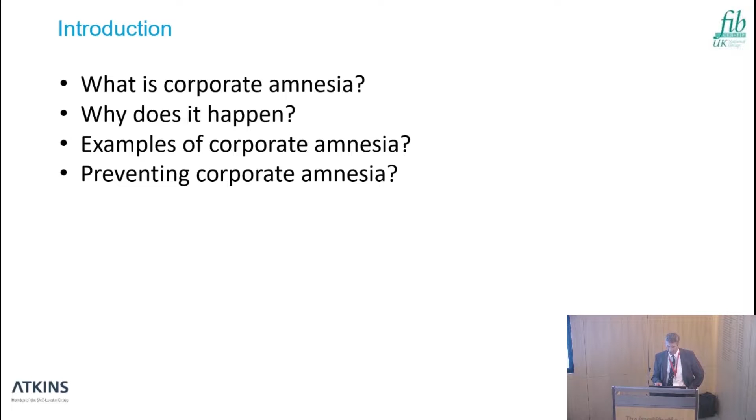So what I'm going to do, I'm just going to very quickly talk about what we mean by corporate amnesia and why it happens. Then I'm going to come up with a few examples that I've seen myself in my day-to-day work around corporate amnesia, and then I'll finish up with some thoughts about what we might be able to do to prevent corporate amnesia, because it's pretty costly to the construction sector.

So, where do we all go for our information these days? Wikipedia, of course. It's always correct, as long as you validate it multiple ways. I quite like this definition, though. Corporate amnesia is a phrase used to describe a situation in which business and other types of cooperative organisation lose their memory of how to do things.

So this implies that at one stage we knew how to do it, but then with the passage of time, either whole organisations or bits of our organisation just fail to learn from other bits of the organisation, and we don't do quite so well.

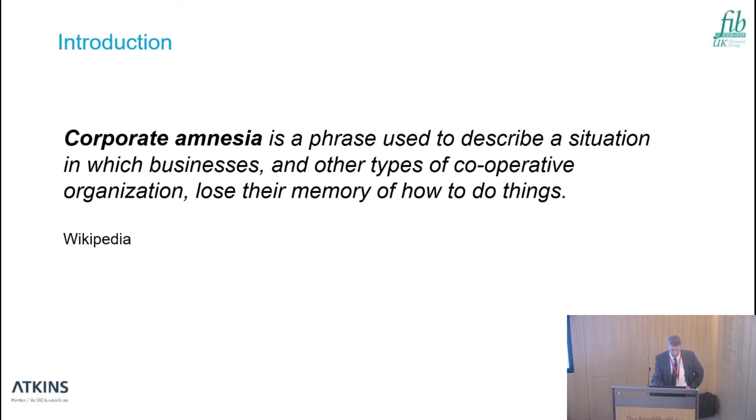When I was putting this together, I tried to scratch my head myself to think, why does this happen? Why do we get things right and then years later we don't get them right anymore? What happens? I'm sure this is not a comprehensive list, but these were some things that I recognised in my own organisation and day-to-day activities.

So first of all, a lot of our information is tacit. It sticks in people's heads. And it's obviously quite difficult to download the contents of somebody's brain onto paper or onto intranet sites. But often there's probably more we could do there.

So because so much information resides in people's heads, when we've got a need to call upon that expertise, often people are just too busy. So you don't get the right person on the project that has the right expertise.

And of course, people move around as well. Ever increasingly, people move from one organisation to another, at ever increasing rates. And so we constantly have an outflux of good information leaving our organisations. Of course, you'd hope some good stuff comes in the other direction as well, which I'm sure it does, but we lose information with that movement.

I see less of it these days, but if I looked at my own organisation, probably sort of 10 years or so, there were quite a lot of examples where people just deliberately didn't share their information. They wanted to hold onto it because they saw it as their pension - this is why you carry on employing me. Knowledge is power. I think we see a lot less of that these days, but there's still a pitfall there.

And then sometimes we have the information within our organisations, but we just don't know it's there. We don't know we've got that expertise. We don't know somebody's learned from a mistake in the past.

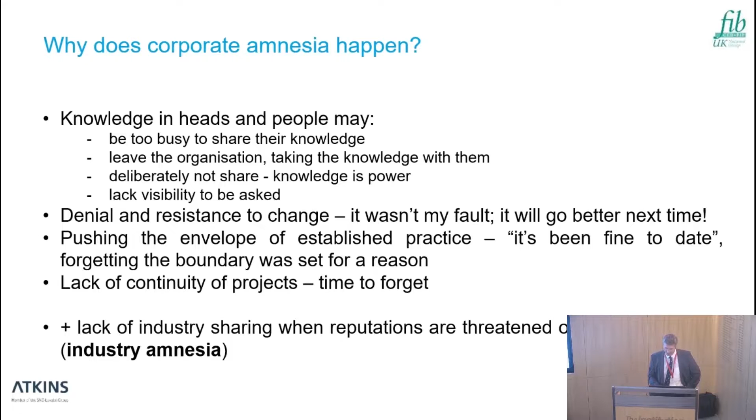I'm going to come on to some examples in a minute, but I quite like this. I'm sure everybody's familiar with this set of quotes from Donald Rumsfeld. Maybe the language isn't very elegant, but I think it's quite a good insight, and it's also quite useful when thinking about what we do corporately.

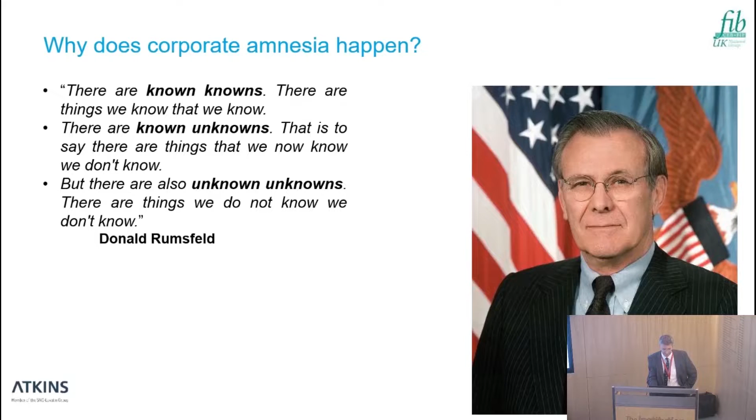So the first one: there are known knowns - things we know that we know. In day-to-day terms, this is basically business as usual. We know what we're doing here, we've learnt the lessons, great, we'll do some more of that.

Then the known unknowns - things that we know we don't know. Well, we don't do that, that's not within our business, we'll stay away from that. If we've got to do that, we'll buy in the right expertise.

Then we've got the unknown unknowns - these are the problems we are all going to stumble into because we don't know what we're doing here, or we thought we did but we don't. Hopefully we'll pick up the pieces, nothing too serious will happen, and we'll move on from that.

But for me, there was a part of this quote missing, and I'm very pleased to be able to unveil the rest of it.

It really was provided courtesy of Stuart Matthews, who's sitting at the front here, who retired from BRE and is an honorary member of fib UK. Stuart basically said there's something missing here, and that is the unknown knowns.

The unknown knowns are basically the things that we do not know that we do know within our organisation, or didn't know. And that really is corporate amnesia.

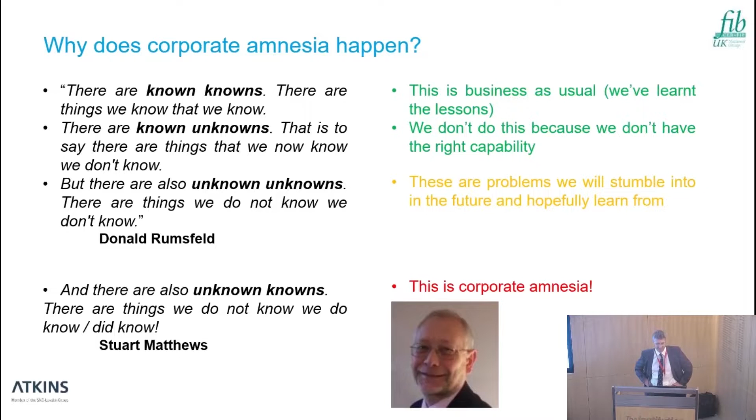So I've got a few examples here of things that just seem to happen repeatedly, often from one organisation to another, but also repeatedly within an organisation. A lot of these, to begin with, are going to be around curved prestressing tendons. I've seen so many issues with these in my 27 years of employment, and I can't believe they still happen, but they do - happening all around the world on a pretty weekly basis, I think.

If we have a curved prestressing tendon like the one shown on the screen, fairly obviously that generates a force into the centre of the curve. If that tendon is too close to the cover zone, and there isn't enough strength in the cover zone, we may well see an appearance of the tendon through that cover zone. These forces can also lead to distortion of cross sections and other forces we need to consider, but sometimes they do get forgotten about.

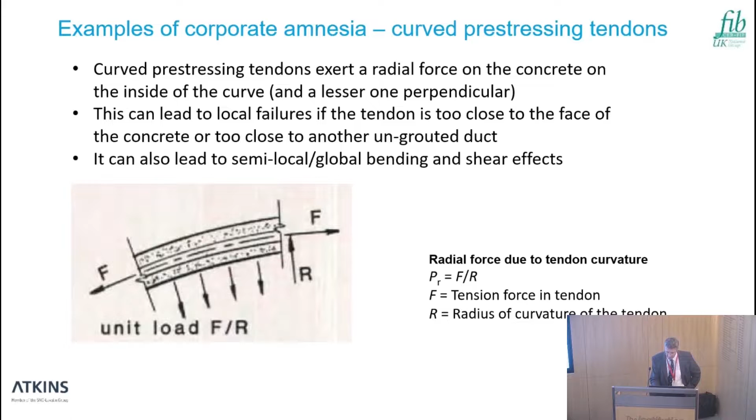Tendons can be curved in bridges for all sorts of reasons, often just by virtue of the shape of the cross section. So if we have a bridge like this one - and there weren't any problems with this bridge, which is why I haven't cropped it or hidden what it is - this is built in cantilever, so construction starts at each pier. The bridge meets in the middle, and then we have some prestressing tendons to join it up, which often follow the shape of the soffit of the section.

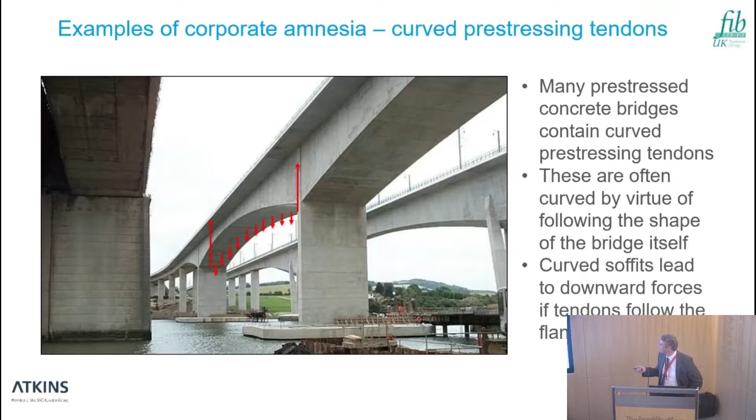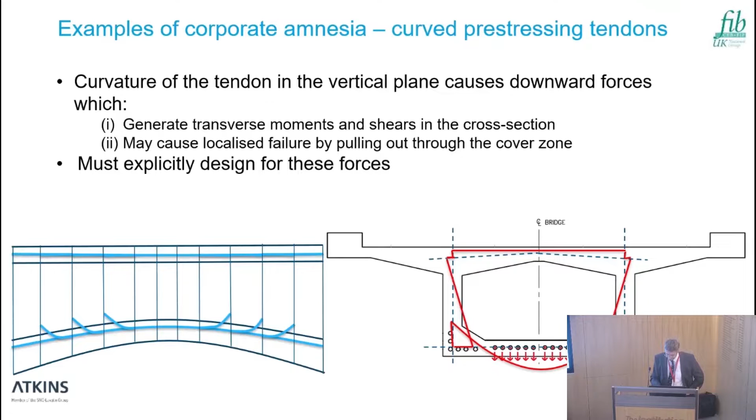But the curvature could also be in plan as well. This is an extract from the Docklands Light Railway extension from the early 90s, one of my earliest designs. The very heavy curvature in plan, combined with the tendons running in the webs, means there's an outward force from the tendons into the centre of the curve.

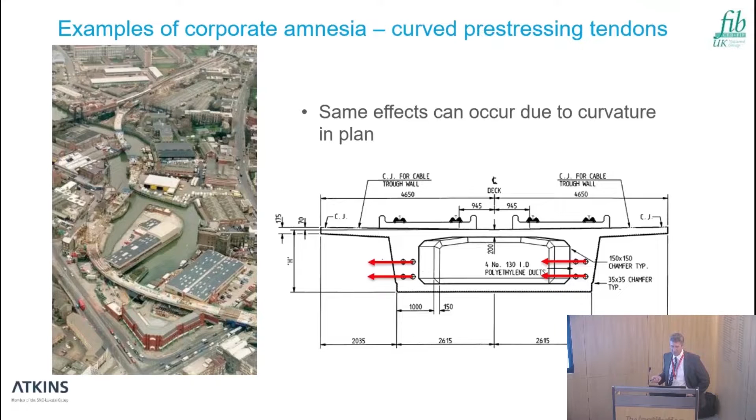There's not a lot - well, I think a lot of designers will recognise there's a force here and a problem. But amazingly, there isn't much guidance in the codes on how to specifically design for it. The only one I'm aware of is the American code AASHTO, the American Association of State Highway and Transportation Officials, which tells you that if you've got a group of tendons like this, you need to check the cover for local bending from that load and for shear. If that doesn't work, you need to put in links to confine the concrete or the tendons, or just change the design.

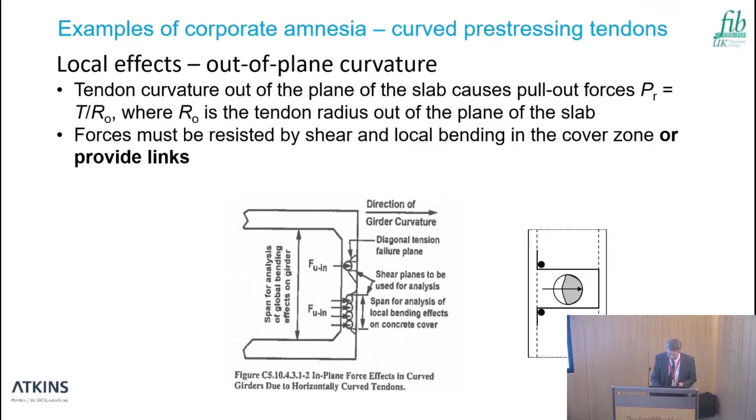And this is a real issue. I couldn't find a recent failure photograph of this, because people tend not to want to put them on the internet. This was a very grainy old one from a paper which I'll mention in more detail in a minute.

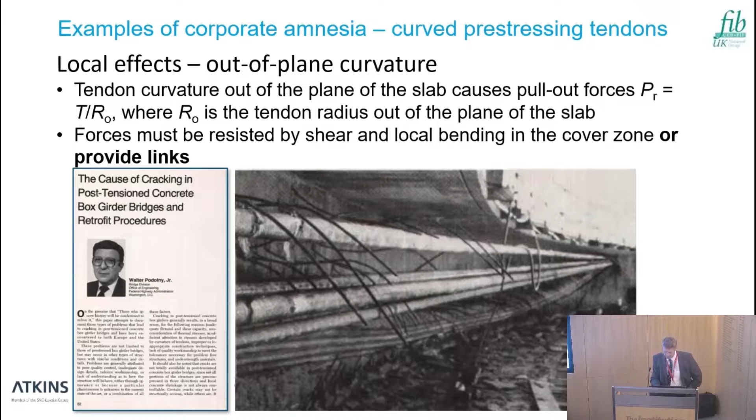But this was a bridge in the US - a curved box girder, curved in plan. You can see that after stressing about two-thirds of the tendons, there was a massive bang, and the tendons pulled out sideways through the web under that force. What we now have is a straight length of tendon as a chord between the diaphragms at each pier. I'm pretty sure the designer of that never did this again - they were very switched on to that effect afterwards. But whether they managed to communicate it to everybody else in their organisation downstream, we'll never know.

There's a secondary issue here, perhaps less appreciated. If we've got curvature in this direction, it's clear there's a downward force. But there's also a force of lesser magnitude, about a third, in the transverse direction. That's because the strands in pre-stressing are not a rigid bunch - they're not all welded together. So when they pull down, they expand out sideways. It's a bit like the pressure in a fluid, in actual fact.

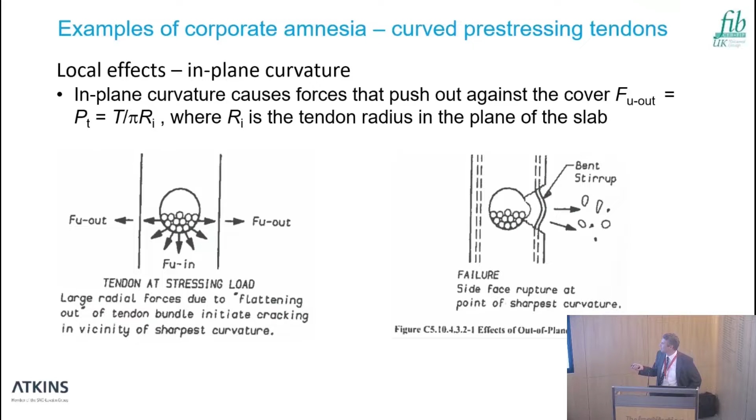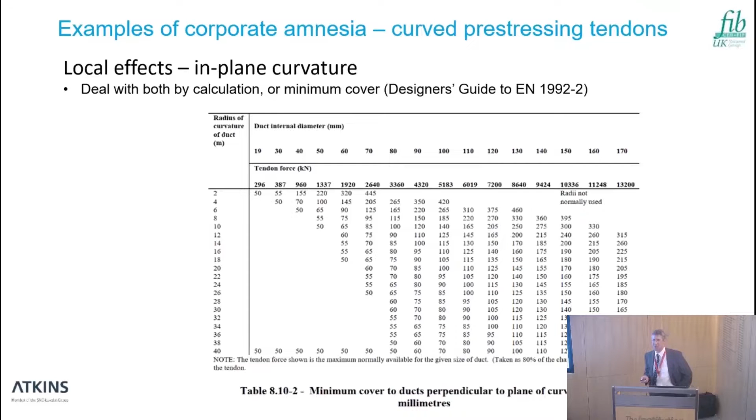And if you put them with high curvature too close to the edge cover zone, you will get spalling. In the old British codes, we didn't have to think about this in particular detail - there were just tables. This table shows on one axis radius of curvature, on the other axis essentially pre-stressing force, and the table tells you how much cover to provide to prevent that bursting. Slightly strangely, there's nothing in the Eurocode now that explicitly covers that problem or prompts designers to look at this issue.

But all the things I've talked about so far, I'm going to continue talking about. They've obviously been known for a very long time. This paper in the PCI journal was published in 1985, and it covers pretty much all of these tendon problems collectively, found around the US and Europe. I quite like the introduction, which basically says: on the premise that those who ignore history will be condemned to relive it, this paper describes a whole load of failures for your delectation, moving forward.

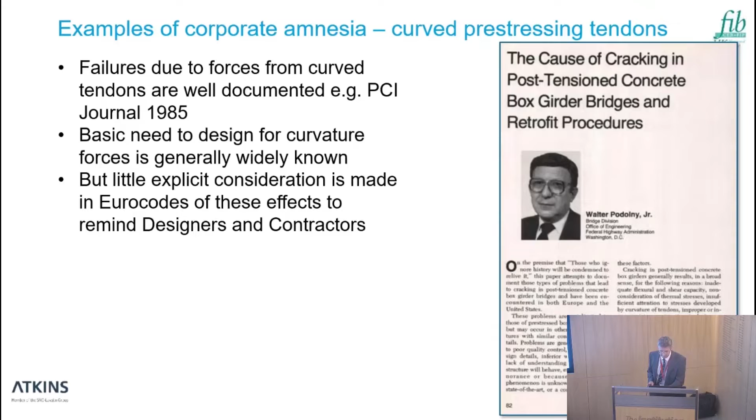Most designers know there's a force involved here from the tendons, but what seems to be forgotten from time to time - and this is when we actually get failures - is that it's very easy on a drawing to have something with a curve on it and calculate a force.

But what isn't done quite so often is consideration of what if that curve isn't perfectly achieved in the design, because it doesn't have to be even within specification. There are tolerances, and the cable doesn't have to be exactly where it should be. How often do designers actually take those additional tolerances into consideration when they calculate forces? Sometimes you might be quite shocked if you calculate what could legitimately be constructed and see how that changes your forces. It's quite an eye-opener sometimes.

There are examples where people building these things get a bit complacent, thinking nothing's happened on my last 3, 4, 5, 6, 7 jobs, so perhaps I don't need to be as careful as we have been in the past. Sometimes the whole need to achieve a smooth profile isn't communicated quite as clearly as it should be. In the spirit of designing out risks, if you find a design is quite sensitive to the placing of tendons, we need to rethink the geometry or think about building in some links to constrain it.

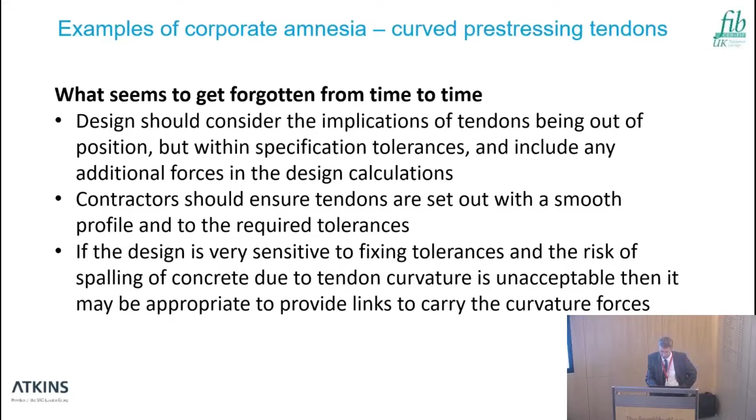The diagram here indicates segmental construction - the bridge was built segment by segment. These blue lines are the pre-stressing tendons, and the little blue lines moving up are where the tendons come out of a slab into an anchorage blister. So it's a fairly standard bridge construction, and the continuity tendons at the bottom here were being stressed up on this particular bridge not very long ago.

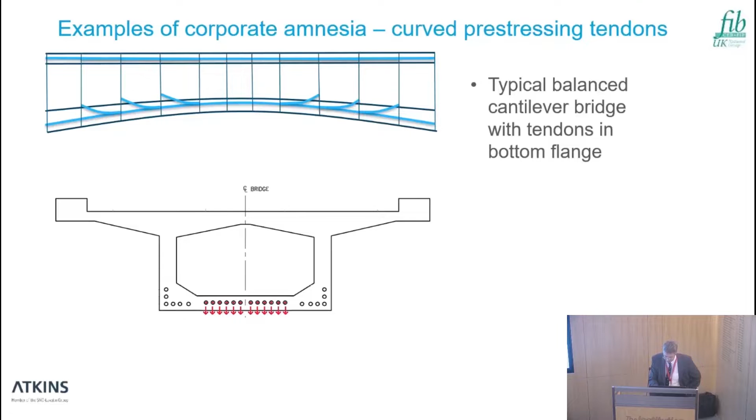There was a nice big cracking noise, and then on the underside of the soffit, this large - I call it a crack, but it's actually a 120 mil step - so not so much a crack as a local shear failure of the cover zone, appeared. This line was basically following the line of one of the tendons.

Upon investigation, done through ground penetrating radar, all the concrete was taken off so you could actually see it later on. What actually happened was that the tendons going through each segment were correct in position at each joint, because there was a stop end at each joint, so they had to be in position. But under the concreting operation, which had driven the concrete down the webs of the box and into the slab, the tendons had been pushed downwards and also pushed laterally at the same time.

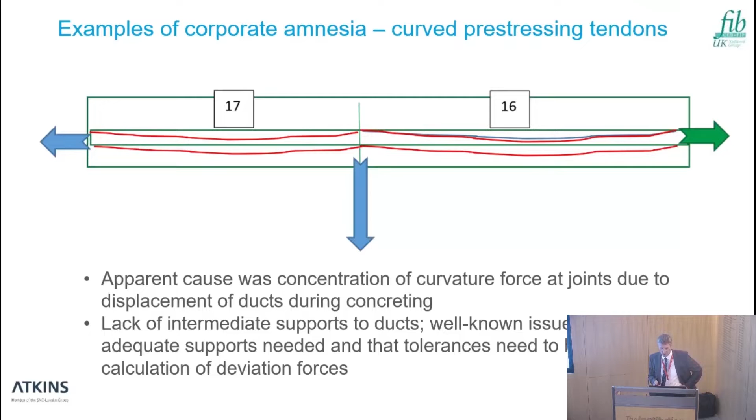This was fairly and squarely due to not supporting the tendon at sufficient intervals to give it the stiffness to stop it from doing that. If I go back to that paper from 1985, you actually see exact pictures of this scenario and exactly what will happen if you allow that to happen. So, in this particular situation, not a great triumph of learning from the past.

But I think in this case there were another set of mitigations that could have been done. Clearly there should have been more supports to the tendons - that's just a fact. But one of the other things was that the detail employed for this particular cantilever had the tendons as a constant offset off the bottom of the section.

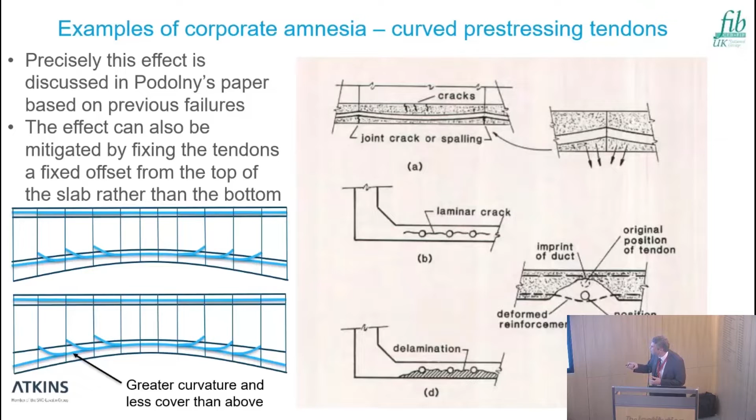This might sound like a good idea to maximise the lever arm. But on the basis that you really want the maximum lever arm mostly in the middle of the section, one trick a lot of people use is to offset the tendon from the top of the section, which both flattens out the curve, reducing the force, and also, over most of the span, gives a greater depth of concrete to resist those pull-out forces. So if you do need to put in links locally to control that spalling effect, you only need to put them in the central area where you've got the least cover.

None of the things I've shown resulted in anyone being hurt or killed, so nothing as unpleasant as the first two talks, but this is still pretty expensive to put right. The repair here was to completely demolish the slab in this area, full depth, after de-stressing the tendons, then recast. Some additional links were put in, even though calculations said they weren't necessary, just because they didn't want to see these tendons fail again. Then it was re-stressed, the job was good, and on we move.

This is a similar example, though from some time ago rather than very current. This was a few years back, but it's a similar story: a balanced cantilever bridge with tendons being stressed, located inside this section of the curve.

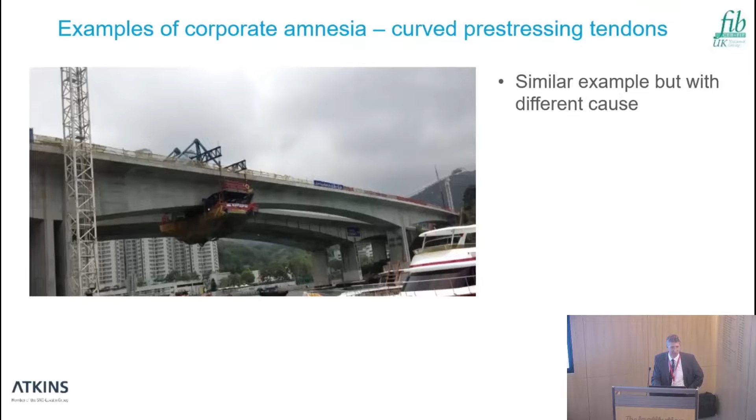Again, stressing, bang. This time, strangely, the people doing the stressing could see the crack because it was on the inside of the section. You think, well, that's quite an achievement, isn't it, to fight the direction of curvature and have something appear on the inside.

Initially the contractor said this was bad design, a compression failure. But that clearly can't be the case, because if it was a compression failure, the whole flange would have disappeared, not just a crack like that.

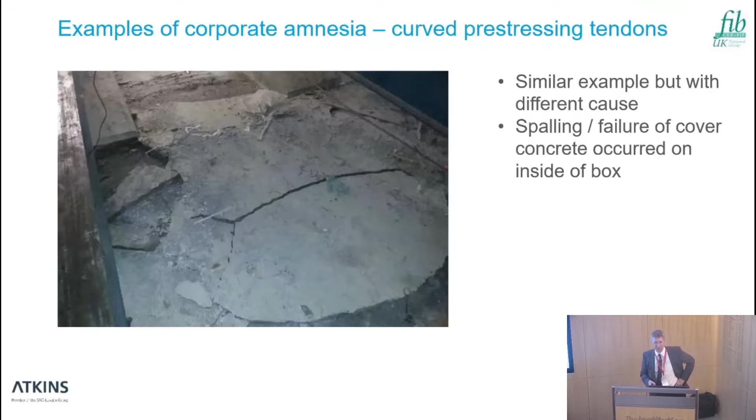This was another frequently made mistake: in the design, the assumption was that the soffit would be a continuous, smooth curve. But of course nothing actually gets built like that in segmental construction - you make a smooth curve out of a series of steps. So the design showed a constant offset off the top, when actually, to fit a constant smooth curve through a sort of threepenny-bit shape, you needed a slight variable offset. One could say it was obvious, but it wasn't explicitly stated.

So what actually happened in construction was a constant offset was achieved in the slab. Then, when you start to build the next segment, you realize you're pointing in the wrong direction. So a reverse curve was introduced to correct things and get back where they should be in the next section. And this upward force, which I haven't shown very well, had a much smaller cover distance here than in the soffit zone, so it pulled off the top.

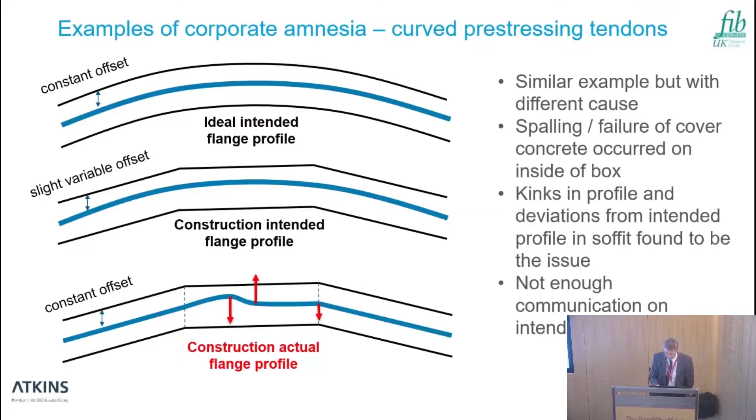In this particular case, the extent of the damage was quite a lot smaller because it was very localised, but it was still a blooming nuisance and delayed the programme. The solution was fairly similar: the tendons were de-stressed, the concrete removed, then the tendons were lightly stressed just to take out any bend and straighten them up, then de-stressed again and reconcreted.

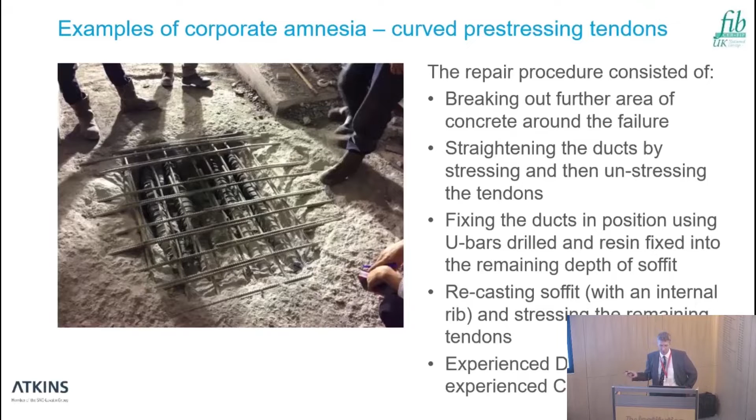But in both of these situations, the interesting thing is it was not somebody being unaware of the problem - it was experienced designers and experienced contractors. They'd heard about these sorts of problems, but it had never happened to them before. In many ways, I think it's difficult to rule out a degree of complacency in some of this design, and not communicating risks maybe as well as should have been.

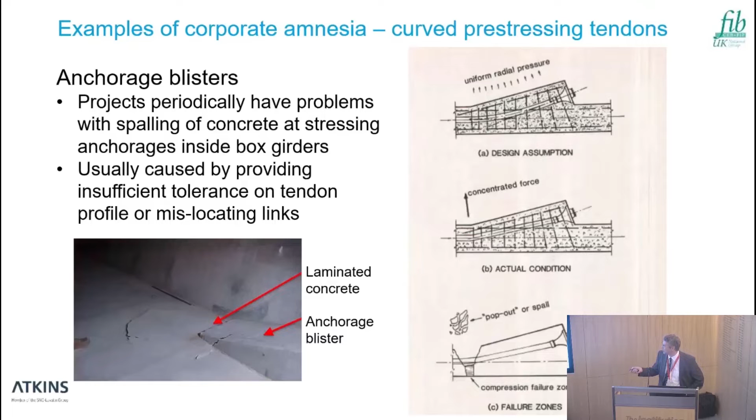To avoid this sort of thing in design, you really want to keep the end of that curvature, the tangent point, well inside the blister, and communicate the pitfalls of what might happen if you don't do that.

Here's another example where I don't know whether this is because the design actually had some curvature going into the slab, or whether this was not constructed properly. But you've obviously got curvature going on outside here that's led to this sort of spalling.

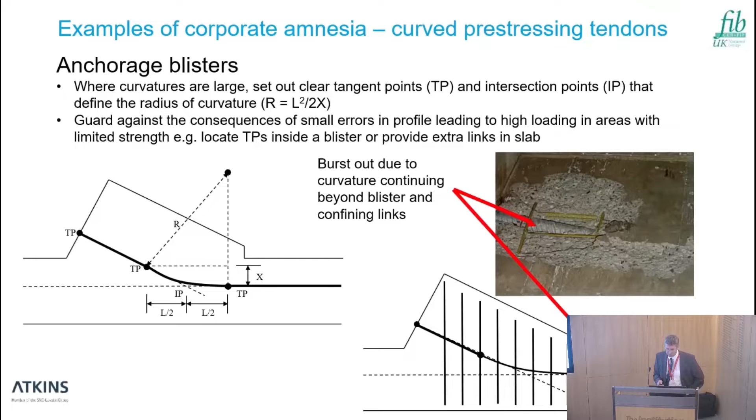There's at least three ways of preventing this. One is to put some compressible material into the cover zone that will ensure any concentrated forces can't bear on the cover zone and bear more inside.

There are bell mouth details, where the pipes inside have a flare on the outside that stops contact. And there's what I call the overbent solution, where instead of having a radius over the full width, you choose to keep your tangent points some way inside.

So the radius becomes tighter, but by doing that we have some tolerance. If the cables are not quite aligned as they should be, you just move the tangent point around the curve, and with deflections the tangent point moves around the curve, but we keep the force away from the cover zone.

These solutions are quite well known, but on all the projects I've been involved with, there's always some pressure at some point from the contractor saying: I don't want to do a bell mouth, that's expensive. I don't want to put in compressible material, that's a nuisance. I don't really believe in this overbent pipe solution.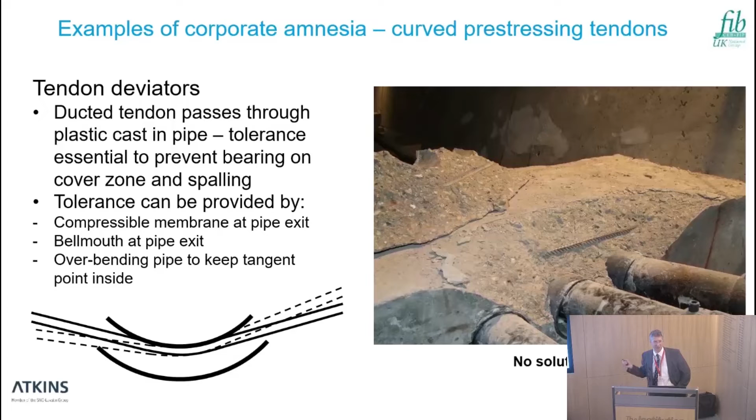I know this organisation has designed these before and not had problems, so something's gone wrong - either being under pressure, or not having learned from a previous team.

When these things happen, these are some of the phrases that kind of come out from people. 'Didn't know it was a problem' - that's probably not so much the case.

This one's more the case: 'We've detailed this before, but we've always been criticised for over-detailing, so we kind of slackened things off a little bit this time.' And oh dear, look what happened.

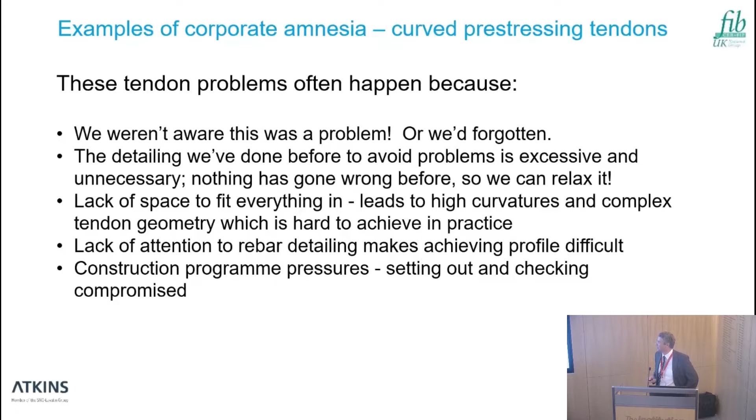Congestion's often the problem - trying to fit things into very congested areas generates big curves, which makes it difficult to construct. But I think number one is often construction program pressures as well, particularly with setting out.

So just a couple of things just to finish with. I'm very conscious of time.

Much smaller things. I was talking to Akram earlier on, and I think you said something like, this is the bane of my life or something.

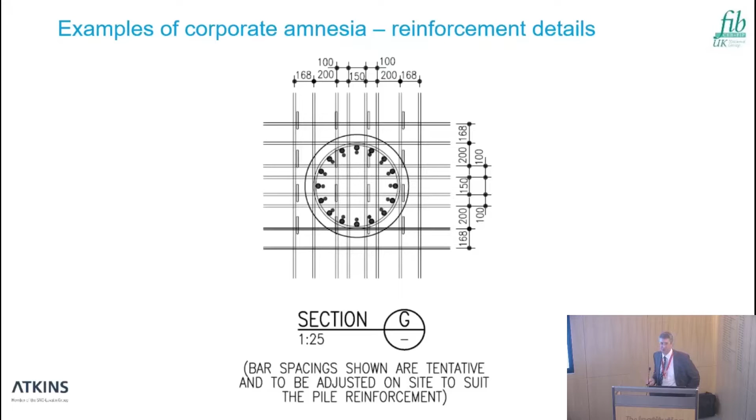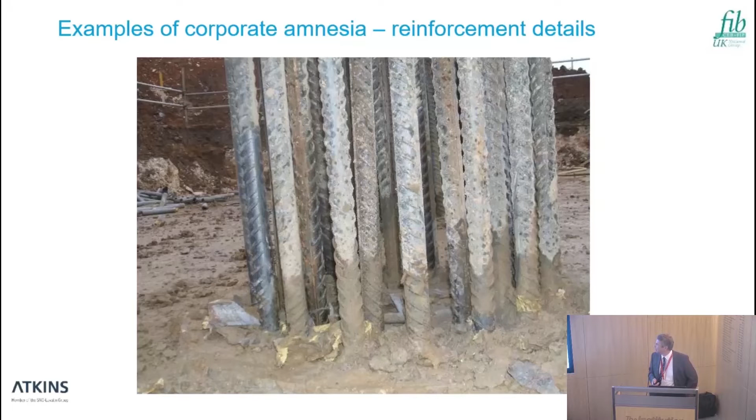But so many times I've seen drawings like this with fairly small piles, a perfectly drawn grid of bars, nicely placed bars in a circle, and then some sort of note saying adjust them on site. Which is all very well and good until you come to site and that's the view that you've got, which is quite a challenge.

You might, if you're lucky, get one of the main bars through the middle of it. You might then choose to stick in some smaller ones in a gap, which probably don't go all the way through, and then the main bars go on the outside, and that's the best you can do.

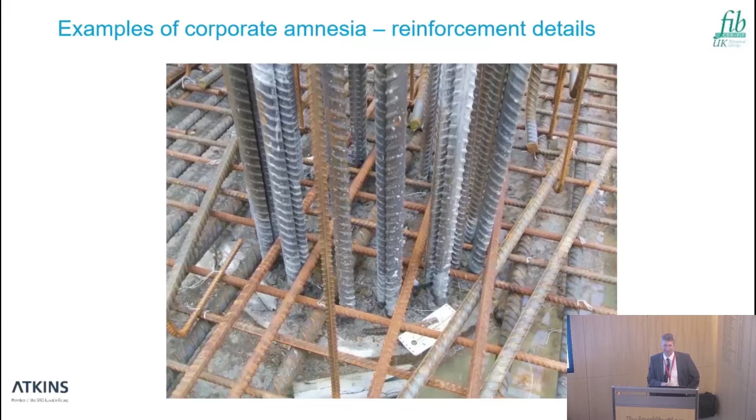I certainly had a fair share of problems in Atkins with these. So particularly for smaller piles where this is a permanent problem, we just came up with a different detail where we basically were saying put most of your main reinforcement outside the pile.

That means you can have a distribution from the pile out to these bars. You've got to put in some distribution steel in the other direction, and you have to make the pile cap a little bit bigger as well to fit those in. But if you do that, you won't get this congestion problem.

And we've had, I would say, 100% success. We've employed that detail. But every now and then, there's always one team that value engineers it back in the other direction again. So the pile cap's a bit bigger than it needs to be.

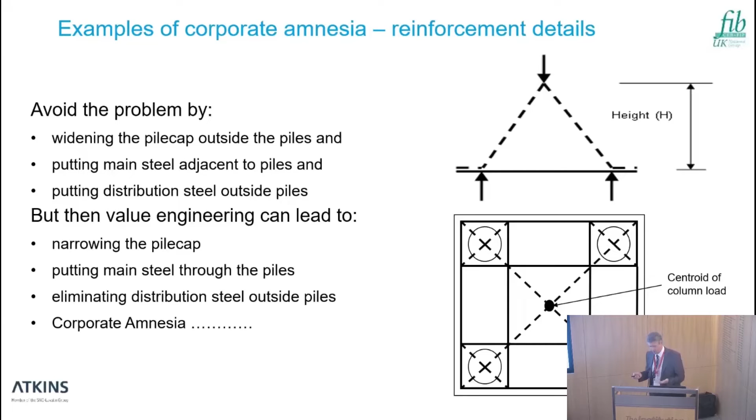Let's make it a bit smaller, and then you get corporate amnesia, and this was a fairly bloody annoying recent one. Again, we're back to square one, where these all have to be cropped off, and you get the email from the contractor.

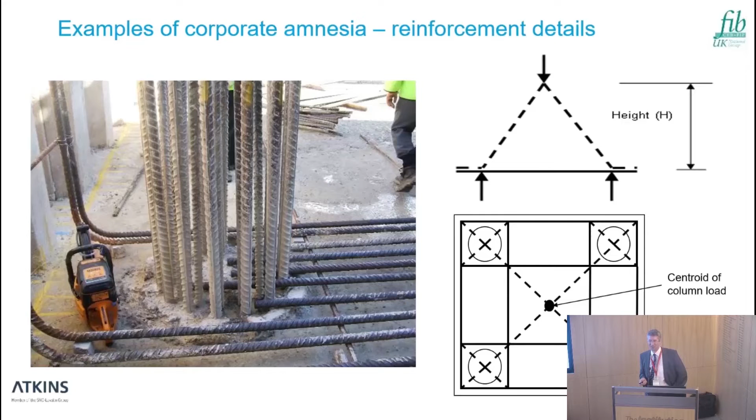We're sitting around waiting. It's very expensive sitting around waiting here. What are you going to do about it?

So certainly within our internal guidance notes we've been putting together for many years now, as well as telling people what to do, we also give the background about why. So that people don't forget, with the course of time, and re-value engineer, in inverted commas, back in the other direction.

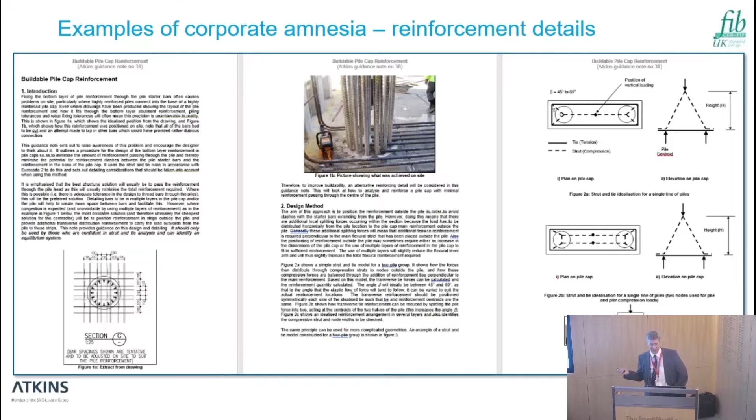I put this one in as well because I think this is another quite good example of very effective industry guidance that actually stops a problem, but then people run the risk of forgetting why that guidance was there and then overstepping the mark again.

And this is the problem with hydrogen embrittlement with bolts. I won't go into this in any detail, but for hydrogen embrittlement to occur, you need three basic things.

You've got to have hydrogen there, which might come as part of the electroplating process of the bolts, or it might come from just corrosion in service. You've got to have a relatively high percentage of stress, typically more than 50% of the capacity of the steel, and then you've got to have susceptibility of the steel, which basically means a high tensile grade of bolt.

So an 8.8, no risk. A 12.9 bolt, great risk. A 10.9 bolt, opinion is divided on this, but current guidance is erring on the side of caution.

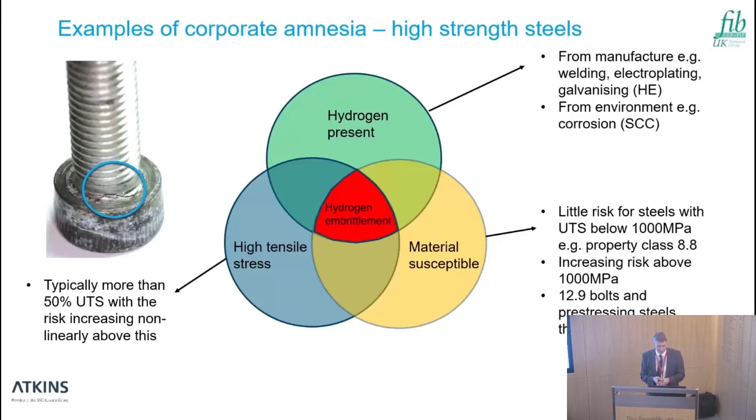And I say there's plenty of guidance out there. I mean, pretty much all guidance in civil engineering says not to use these sort of bolts outside or with electroplating, for 10.9 bolts.

Basically don't galvanise with acid pickling because that introduces hydrogen, and don't use electroplating. And if you are using 10.9 bolts, try not to use them in heavily corrosive environments, because if they do corrode, you might get this effect.

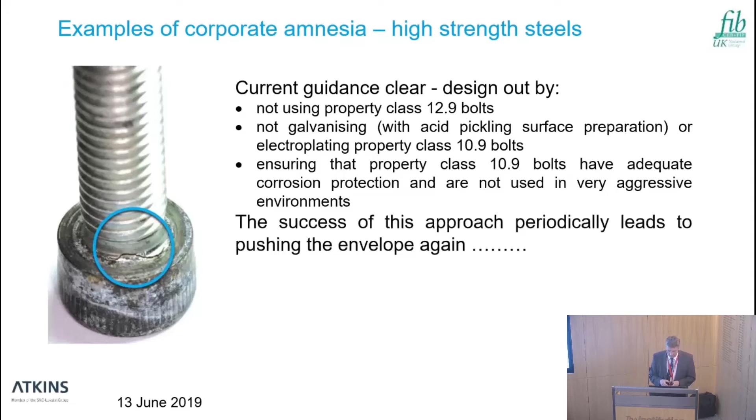But again, I think this is where periodically people forget why those lines are there. I've had to crop out most of this.

Following the guidance, essentially. The contractor didn't have any 8.8 bolts in that particular diameter, but he did have some 12.9 in a smaller diameter that provided the same capacity.

So they were put in, and 18 months later, a bit of corrosion had occurred, and hydrogen embrittlement set in, and one of the bolts failed, and then the others all failed as well at the same time. So a pretty cautionary mistake, and that particular team involved, I'm sure, won't make that mistake again.

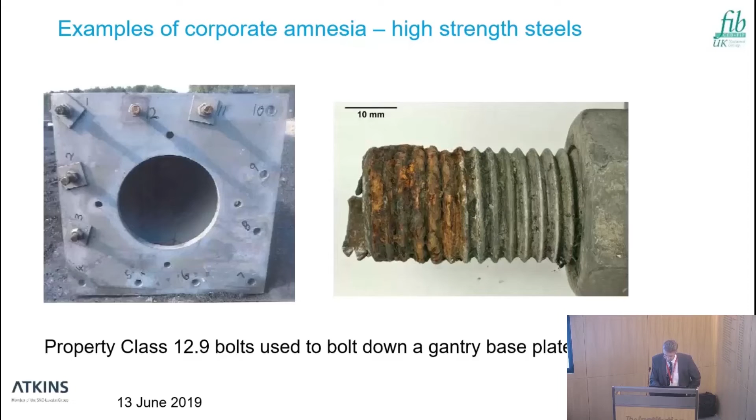Let me just jump to that. So just to conclude, just one thing that we've done internally within Atkins to try and help with this, with I'd say some success.

Going back about 10 years ago, we realised we had too many areas where we were not learning properly from one office to another, and that's still corporate amnesia, because everybody else that looks at Atkins just sees Atkins, not the Atkins Croydon office. We realised we had very effective technical networks that were able to talk to each other and ask each other questions, but we hadn't been very good at actually physically writing stuff down and making sure we brought that back into our design practice.

So we brought in a formal lessons learned process about 10 years ago. We wrote up about it - I can't remember the exact date, probably about 2011, in the ICE proceedings.

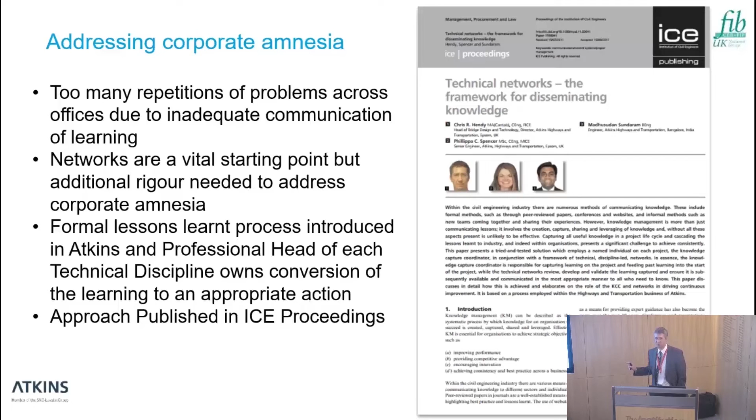Very simply - and I'm not suggesting everyone should go away and do this if they haven't got one, it just kind of works for us - we set up a very simple lessons learned register, which everyone is obliged to use on a project if they do something good, or something not so good that they don't want others to repeat.

You put in your project, a bit about what was good about it, what wasn't so good about it. We use our technical networks to assign it to the professional head of that network, and it's then their responsibility to do something with that information - whatever it is, it might be to write a technical instruction, a guidance note, change our software or whatever, but it's their job to do that.

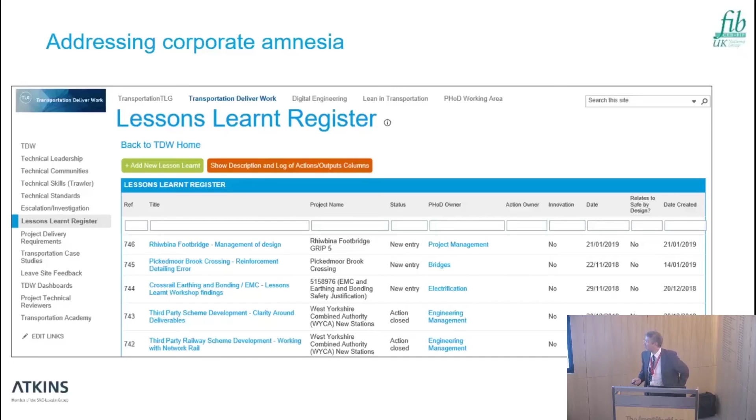We don't require too much information, because that's the key. If you ask lots of information from somebody, they won't put anything in. So we require the bare minimum, just what was it you did and what happened, good or bad.

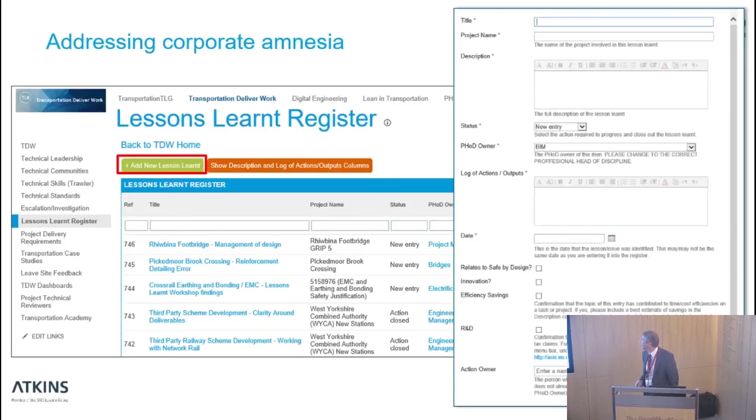The professional head, poor chap or woman, has to go and follow up and do something with it. This then becomes really our source of ongoing guidance notes and instructions.

A typical example here was something around precast deck panels. Somebody on a job came up with a new improved detail. It saved the contractor a lot of money, so we wrote it up, and that's now our standard way of doing full depth precast deck panels.

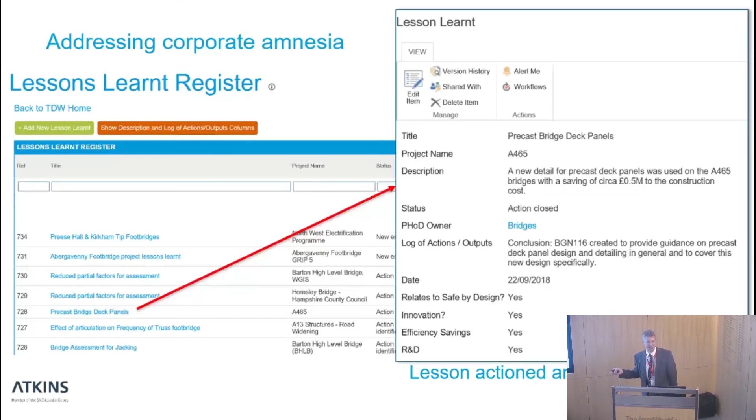The output is usually some sort of guidance note. Critically, if it was a bad thing we've got to avoid, it tells you what it was, but it also gives you the background about why to avoid it, so we don't forget the learning from that.

Of course, it doesn't oblige anybody to pick up the blasted thing once you've written it. They can still ignore it, which is a challenge.

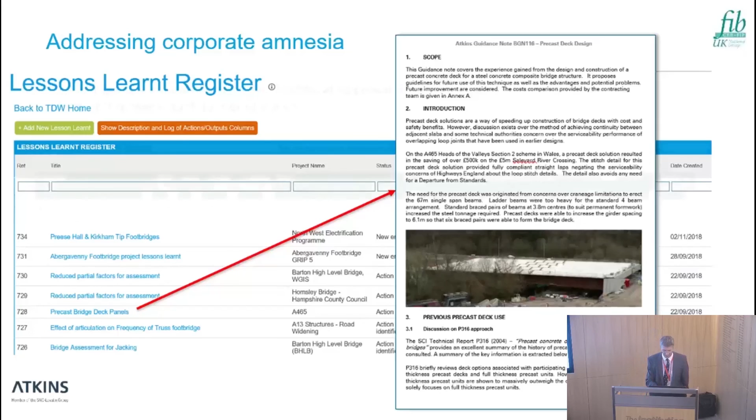So what we've done on top of that is - people working in Bridges world for big customers like Highways England or Network Rail know that clients have a technical approval list of all the standards you've got to follow. Internally, we have exactly the same for our guidance notes. We list them all out, and designers have to go through and tick which ones actually apply on their projects.

Still doesn't solve it every time, because not everybody complies with our processes, of course, but it has helped a great deal. And I guess that's all I can really say on that one.

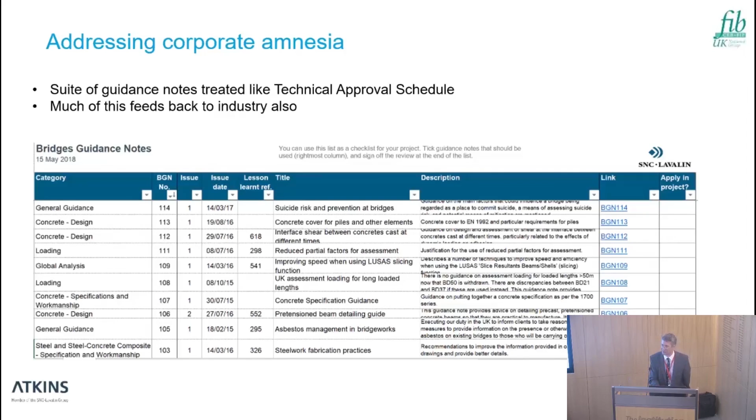So just to sum up, I think there's all sorts of things going on in the industry at the moment to try and improve our productivity and make things better. But I think if we could just cut out some of these frequently repeated mistakes, we'd probably be a lot better off. A formal lessons learned process has worked very well for us, but we're far from perfect.

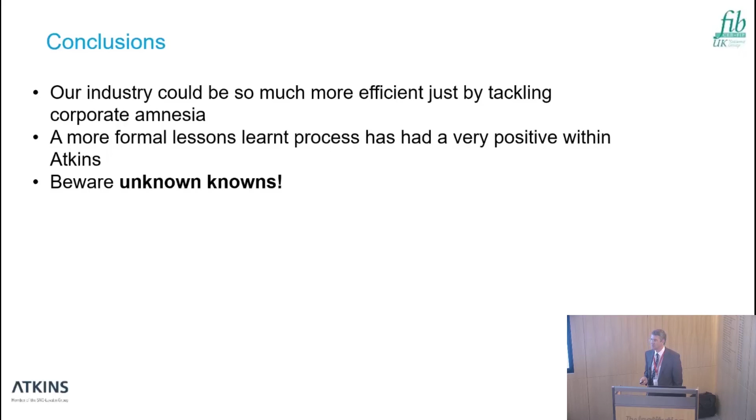And beware the unknown knowns, courtesy of Stuart Matthews. Thank you very much, Stuart, and thank you, everybody.